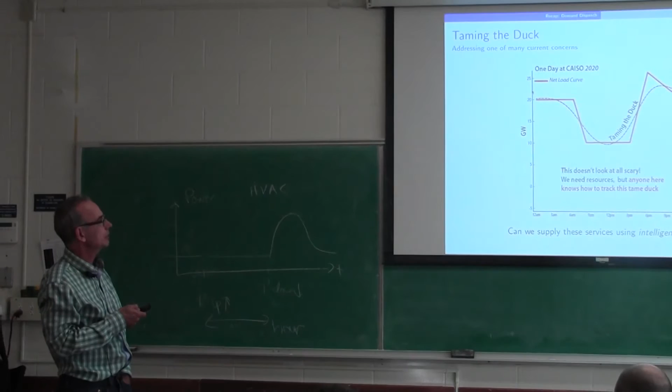So I started to talk about this work with Anna Busic, but just general principles about how you would deal with an on-off device, and I'll go and explain that a bit more. So again, I won't go through this again, but the first thing I think a first step as a control engineer is to look at the thing you're trying to do and break it up based on the resources you have. That's the idea of this.

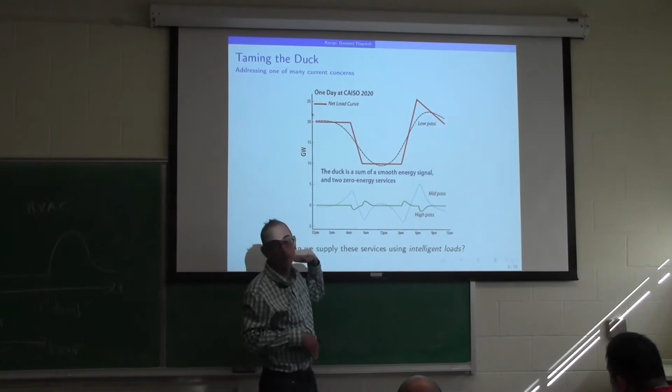I had this duck curve envisioned of the future of power net load in California, load minus solar generation. If you break it up into 3 signals, the low pass, mid pass, and high pass, it doesn't seem difficult at all, as it did in the beginning. Because you can shape that slope, shape the ramp so that traditional generators, whatever resources you have, can follow it. And then these are zero energy signals that you can get from other resources. So this is the way a control person would think of this.

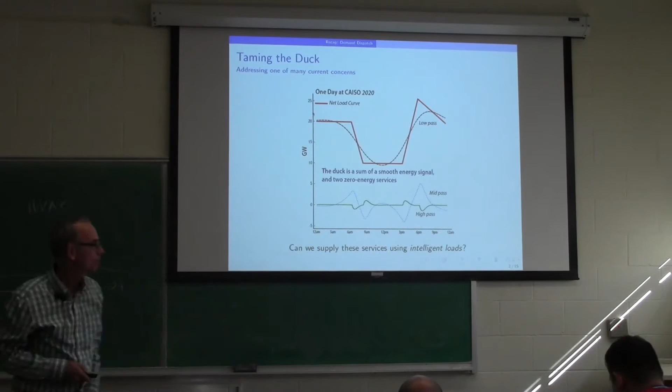I think any control person who's faced reality before... And we had a fun discussion after lecture on Tuesday. On airplanes, there are flaps and ailerons, and flaps have slower motion, we think, than ailerons. We have to look this up. So it looks like those would be flaps and those would be ailerons in an airplane. Let's look that up before, make sure we're right.

So how do we get these intelligent loads? Basically, this is another example, I won't go over it again. But if you wanted to get the purple and the blue signals, how would you get them?

The red is from traditional generation, most likely. I mean, what else could it be? It's energy—you need a controllable energy source somehow. I don't know what we would do if we only had thermal, wind and solar, and no large-scale controllable resource. We'd be dead, wouldn't we? So at least the next 50 years we will have traditional generators, and they will be able to track signals like that. The point here is 50% renewable integration is probably trivial. I bet we could do that in the next 5 years, based on what we know today, if we were allowed to get going.

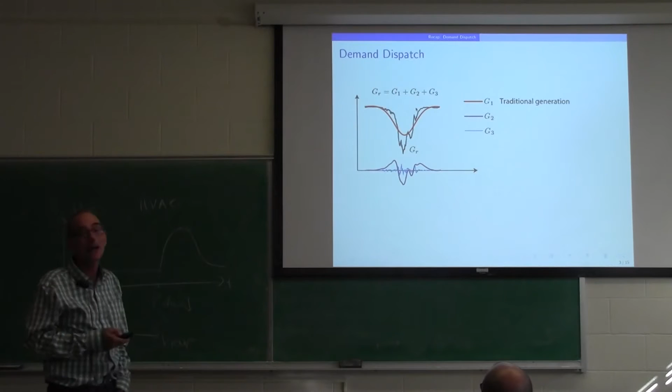So again, the purple is low frequency pool pumps. Florida Power & Light is on it, and our group has for a while too. Water pumping is amazing, and again, the blue fans in commercial buildings are a big load. It's really surprising—the energy consumed in these fans is like a third of the energy in a commercial building's HVAC load. It's amazing, and they're incredibly flexible. The people who actually installed the stuff at Pugh Hall said, I'm wrong about noise pollution—there's no noise pollution, you can't hear a thing. It's hard to believe, but that's what they say.

So the high frequency part, which is the most expensive product in PJM, is the thing that's totally free. It's like air—it's everywhere. And this looks much, much harder, but then this is huge. Pool pumps are just, there are a lot in Florida, but trivial in most of the world. But water pumping overall, all over the world is massive—sanitation, agriculture—and it's everywhere. It's very, very flexible. So we've got this, and the question is how to harness it.

How do you get the flexibility? How do you create that signal from loads and do it in a way that's not disruptive? And that term demand dispatch that Google coined, and I'm trying to promote, is this idea of being able to track a signal like that without impacting consumers. This is all marketing, okay—it's just I want a term that doesn't mention prices. There's no price here. The economics comes later. After we build the product, then we can talk about markets.

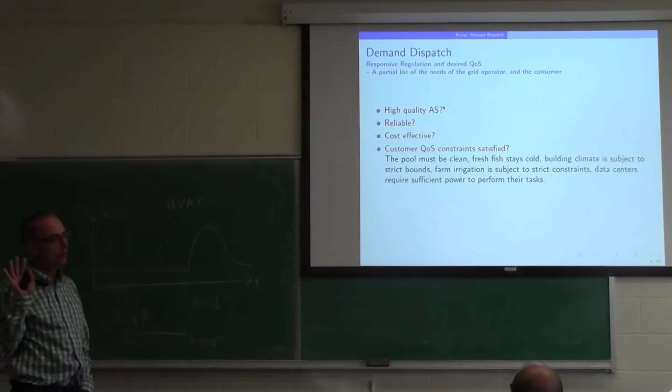All right, so again, we did this. I'm not going to say it again, but we want high quality ancillary service to the grid. It should be reliable—those are grid level issues—and cost effective, both for the grid operator, mainly for the grid operator. But this whole thing here about the consumers being absolutely untouched—I don't want them, unless they volunteer to suffer a bit. I don't want them to suffer.

And so basically this idea of virtual energy storage, which is a manifestation of demand dispatch, is intended to achieve all these goals simultaneously. And I was screaming last lecture that you need a certain distributed control architecture, because if you want to maintain the QoS constraints in particular, something there has to be monitoring QoS, like the temperature in the building and things like that. But it's much more important than that—you need a particular control architecture for a lot of reasons, which I'll explain.

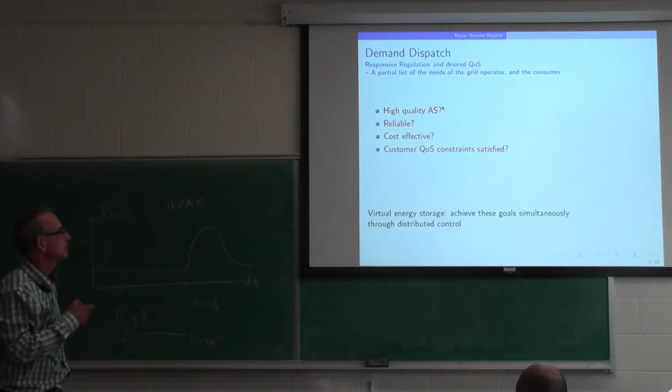All right, you with me? So this is what I want to go through. So basically, one load would have an architecture like this, which I'll explain. There'll be some signal zeta t, which was rho of t before, which is going to be broadcast to a collection of loads. So maybe all residential water heaters will get one signal, and all residential pool pumps will get another signal, and all commercial chillers will get one signal. You'll break this out. I'll explain how you would do that at the end of the lecture, how you would decide how to allocate different resources and do this.

And each load monitors its health and other quantities. So the load has two measurements: a grid level measurement and its own state, which for a refrigerator would be temperature and whether it's on or off. Now again, the pre-filter I'll explain later.

The decision rule here, do I turn on or off, is a major challenge. And as I said, Florida Power & Light, I think, is thinking of centralized control. They'll have a list of all 800,000 water heaters, and they'll turn one off and then the other and then the other. And maybe that's, maybe it'll work for them, I don't know. It sounds like they don't need to do that anyway. And also, it's intrusive as hell—they'd have to collect all that information and send it to them. They would need to know the state of health of every fridge or every water heater, every home. So it would be like a combinatorial problem. They would do it, yeah. The combinatorial—I mean...

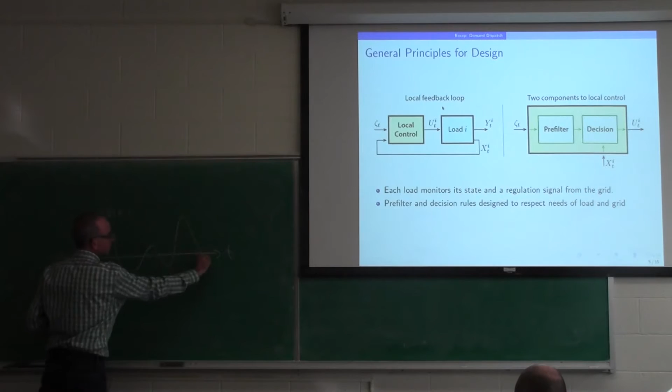Let me go back to the goals again. Remember, like the low frequency things I've talked about sort of look like that. Maybe that's... one hour.

Because we're always talking about the deviation. So the average power is, say, 500 watts. So we're talking about deviation from 500 watts for the aggregate of pools. So you can imagine how hard it would be to do that. I mean, sure, you could write code to somehow fill this in with staircase functions and then somehow stack these all together. But I don't know.

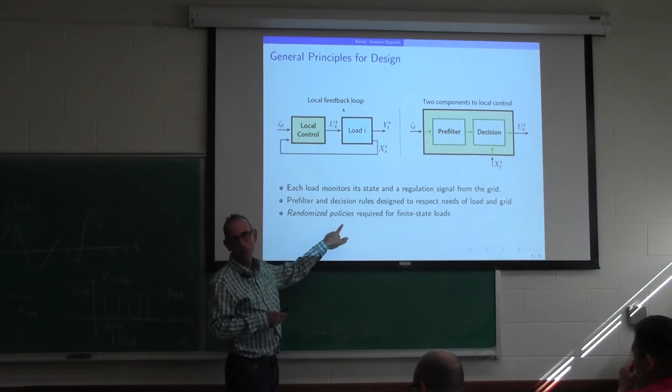So the decision making, do I turn on or off? That's a hard problem, and I claim that randomized policies are absolutely required, which means I have to define randomized and I have to define policy. And so it's fun to type in randomized algorithm in Google to get enough hits. And you'll find 1,000 books, 1 billion papers, and all sorts of things.

And this particular flowchart here, see the rand command there? It is to avoid synchronization in a communications grid. So everybody's backed off. They don't all jump back in together when congestion clears. They wait some randomized time before they get in. Now, this is a terrible analogy because randomized algorithms in communication are known to be inefficient. The capacity is maybe a third of what we can get from a more central, non-randomized algorithm. The typical randomized algorithms that have been proposed.

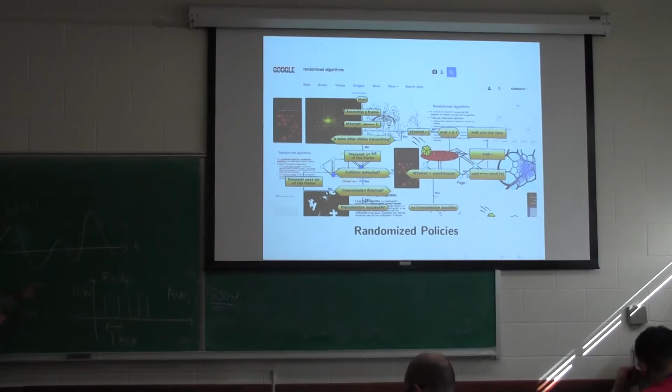So the only point is to say they're used a lot when you need a very simple solution to a complex, sort of combinatorial problem, like trying to fit in all these blocks in this curve. The randomized policy is not always bad. It's only in cases where, like when this was first done in Hawaii, it was for incredibly cheap hardware. They wanted really simple, cheap decision rules for multiple access communication, and so naturally, with so little information, so little computing, you had low capacity.

But with a little more information, a little more science, there's no problem at all. Randomized policies are awesome. But I have to define randomized and I have to define policy.

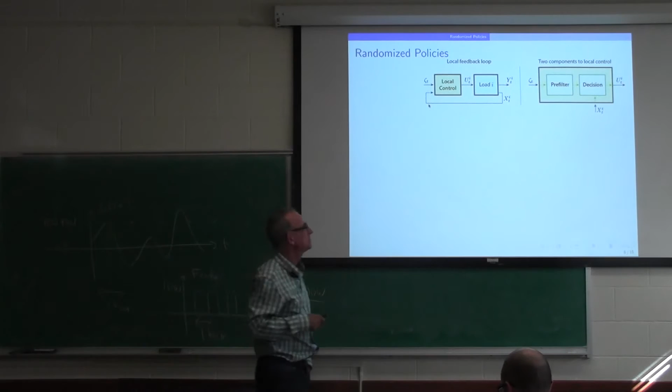So let's do it. You weren't there. You don't have to sign. Yeah, that was for the talk. Okay. So we covered all of that. Just kidding. Okay.

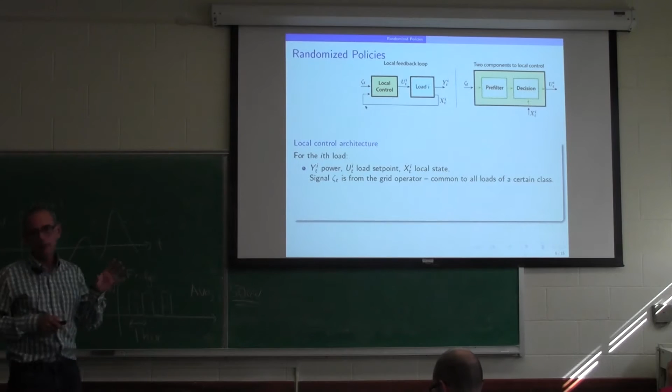So what do I mean? So basically, here's again the local control architecture. Again, this Y out here is going to be power from the load. So it's 1 kilowatt, 0. 1 kilowatt, 0. U is a set point. So let's mainly think it's on or off, but it might be multiple. Like fans have multiple speeds, low, medium, high, or off. So there might be 4 values, but it's going to be discrete. I'm just thinking about what do we do in these combinatorial problems.

And then X is a local state. Again, for a fridge, am I on or off, and what is my temperature? For a pool, am I on or off? How long have I been on? How long have I been off? And so, for any kind of system, you can imagine what you think about as a state. What are important variables?

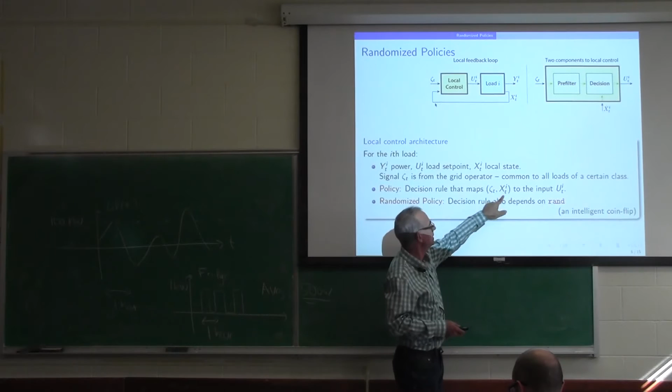And again, zeta t is from the grid operator and common to all loads of a certain class. A policy: in industrial engineering, control, communications, it's a decision rule. It's some rule that takes this and maps it to decide, do I turn on or off, or what power set point should I be at? Okay, it's called a feedback control law. In control, or actually more in operations research, they call it a policy, but this is what we're talking about.

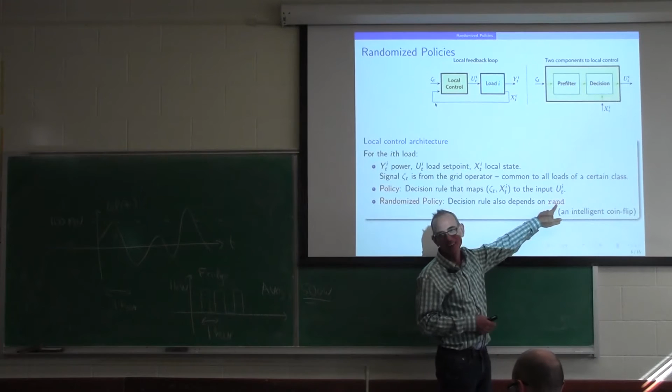But a randomized policy again is just one that also uses the rand command in MATLAB. Not really, but it has a coin flip. And so it's an intelligent coin flip. And that's what's dangerous. When you say randomization, it sounds like you're saying arbitrary, like I'll do something crazy. And not at all. You do this very, very careful design. All right? So it's a very, very intelligent coin flip.

And you do this in a way to make an aggregate of loads follow that smoothly and beautifully. You want the aggregate of loads to look like a perfect battery. You can charge and discharge, and just do what you want with it. And that gives you degrees of freedom, is what it is. On/off is not many degrees of freedom, but on with probability 0.2 or 0.3, 0.4, it's a whole range of choices, and so you need that.

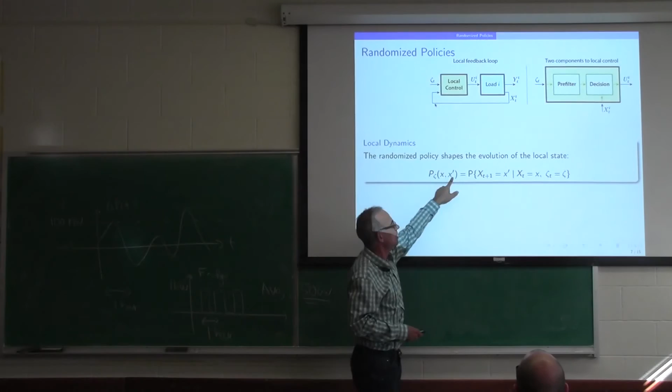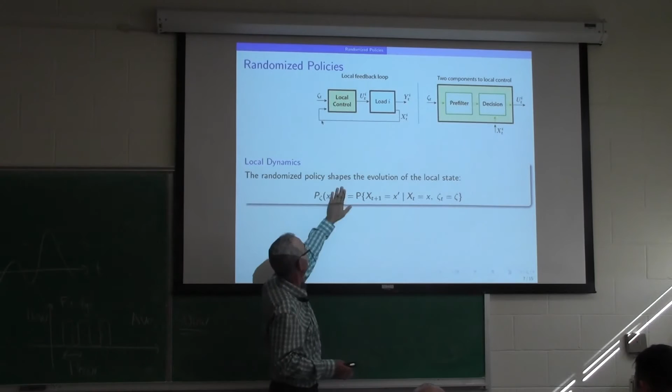So now I need some notation. This is just notation to define what I mean by randomized policy. And I swear this will be the only notation you'll have to see. This is just typical notation. If you take my course next semester on stochastic processes, or if you've taken a course where they cover Markov chains, you'll have seen this. Okay? So this notation is the probability that the new state is x prime, given the old state is x, and zeta t is some value zeta. So I've got a function of 3 variables here that I have to design.

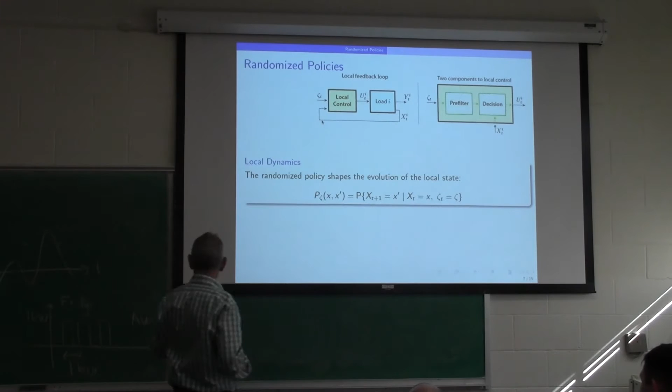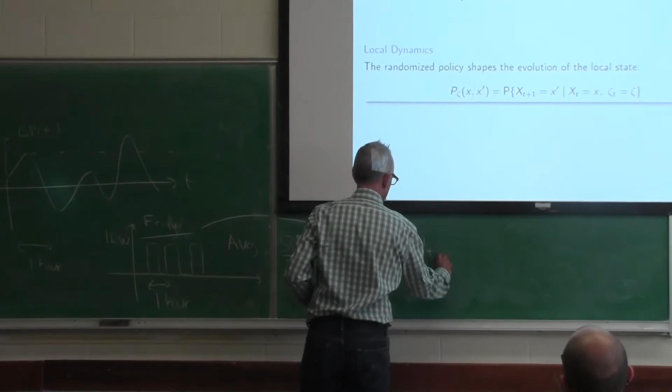And part of this is going to be the dynamics of the fridge or whatever. For a refrigerator, it'll include U of t, which is am I on or off, and it'll include the temperature. So some of the randomness is from nature. People open and shut the door, or a defrost cycle comes on. So that P, I can't design it all, but I can design the part here randomly: do I turn on or off through some randomized control architecture? That's part of the reason why this design is difficult, some of the randomness is from nature, and some of it I'm actually building into the system.

Right? There's no way I could talk about design. I'll give you examples, but the design of this is way beyond the scope of this course. But at least I can give you some examples to give you some insight as to what a good design might look like. Okay? So there's two questions. How would you analyze an aggregate of loads? I've got a million air conditioners or refrigerators. How do I analyze how they behave together? And I'm going to try to explain that today.

I don't know if I can get away with it. And how to design P zeta, I won't try. I don't even know the best way. It's totally a research topic. We came up with some hacks that worked, and I don't know why they worked so well. But that design was the basis of the patent that I mentioned.

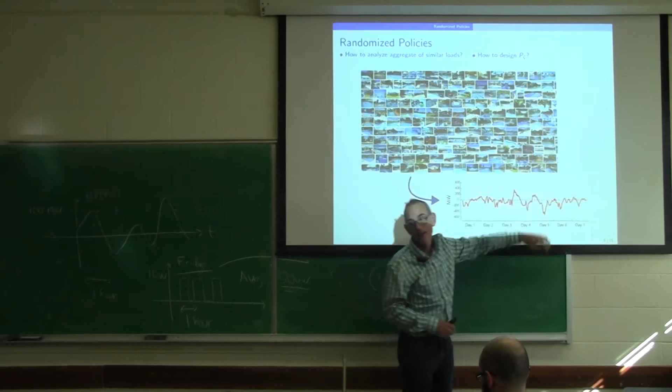But a significant portion of the Bonneville Power Administration's balancing reserves are on very low time scales, corresponding to, look at that, 6 hours down, 3 hours up, 6 hours up, 3 hours down. Pools are saying, yay, we want to help. They're made for that. And unfortunately, there aren't a lot of pools in the Pacific Northwest.

But again, they have gigantic refrigeration plants that consume a lot of energy for cooling, for keeping fish clean, cool, that they can ship off to Japan, things like that, to Asia.

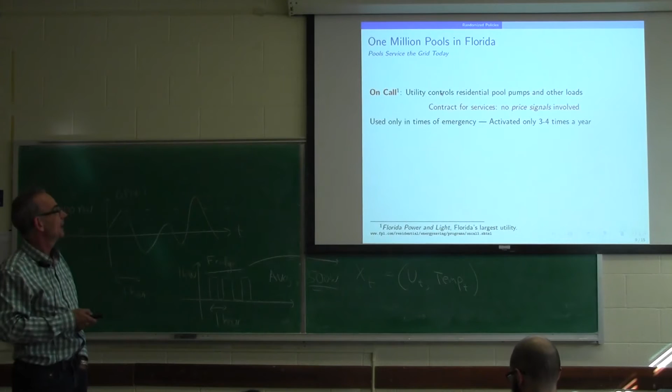All right. So again, this is hilarious. So I wrote this last night. I knew I'd be talking to the on-call people this morning, but you've all heard this now. On-call, we just saw, controls residential pool pumps, water heaters. We just saw that for businesses as well as residential. And again, contracts for services, they laugh at the idea of real-time prices. It's absurd. I can say that on camera.

And today it's only used in times of emergency, but I've heard that they're interested in wider use of this program. So again, this is from a talk 2 years ago, that they have their hands on the switch of nearly 1 million pools. So why don't they do something more with it? So this was a pitch I gave to them actually 2 years ago. All right, so here's an example. How would you design an intelligent pool?

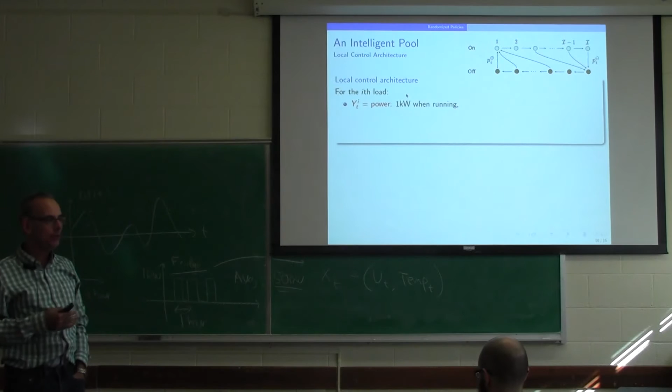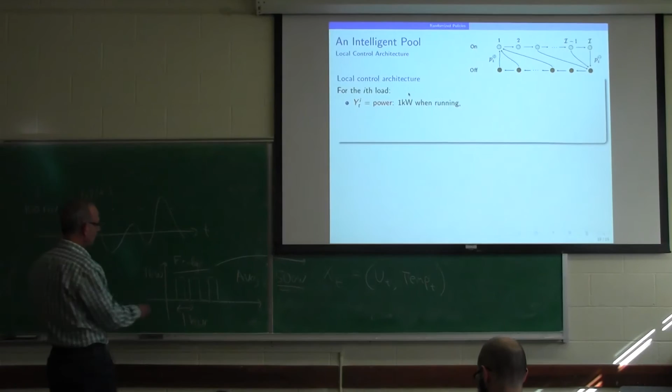So after moving to Florida, I had a pool for the first time in my life. So now I know firsthand how they work. There's a pool pump, and it operates just like that. So instead of 1 hour, it's 1 day. And so the pool pump, say, runs for 8 hours, then it's off for 16 hours. Then it's on for 8 hours and off for 16 hours. But just for simplicity of this lecture, let's pretend it's 12. Mine's on 12 and off 12. I have a symmetric operating cycle.

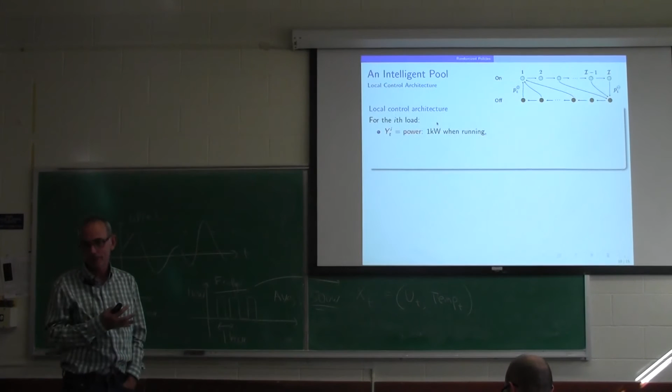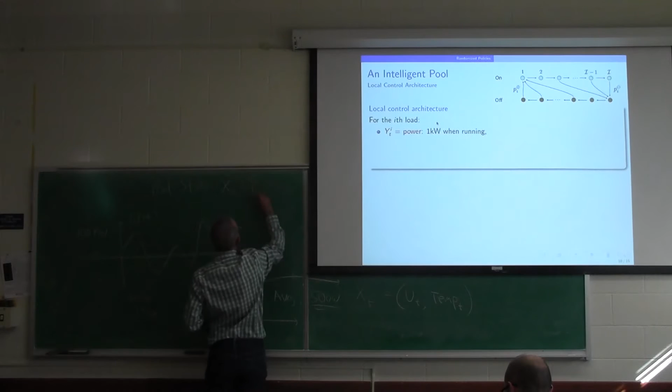And so here's this evolution of the state. So exactly the same. It would be the power setting state, am I on or off? And then the cycle time. How long have I been on or how long have I been off? Because that's the important indicator, right? Basically, if I'm off, I want to know how long I've been off, because when 12 hours is reached, I want to turn on. So that's the important indicator.

Now, people don't care that much. If somebody changed my cleaning cycle to 11 hours today and then 13 hours tomorrow, I wouldn't care at all. And I don't think anybody with a brain would care at all. I'm sure that somebody could convince the public that it causes brain damage to have your pool cycles change like that. But it's not true, okay?

So all I care about is getting so much water flow through per week, say, or per month. Or there's certain constraints. Quality of service is very complex. But I'm sure I could come up with a contract I could accept based on hours. I want the number of hours per month exactly the same as my nominal behavior. No change at all. Every month I want to make sure exactly no change in the total hours. Why? Because I want my energy bill to not change.

And maybe I want to limit the number of cycles as well. I mean, on-offs. I don't want them to be turning on and off my pool pump every minute. So you can't increase my number of on-off switches by more than 50%. That's the idea of a contract. And then they can play with what's left. And so here it's just like a fridge. It's a kilowatt when running. I guess that's a big fridge.

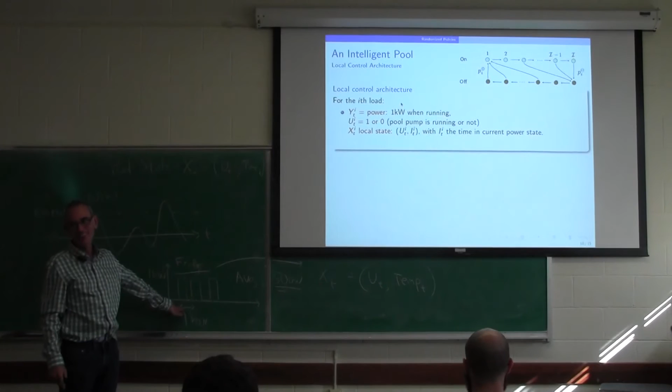And the nominal behavior is that after the equivalent of 12 hours, I go from on to off, and I go again. So the nominal behavior is deterministic. I deterministically move along till I get to 12 hours, jump down, move along, 12 hours, and it's this periodic behavior. A fridge and a pool are the same. Okay. But we're going to throw in some randomization.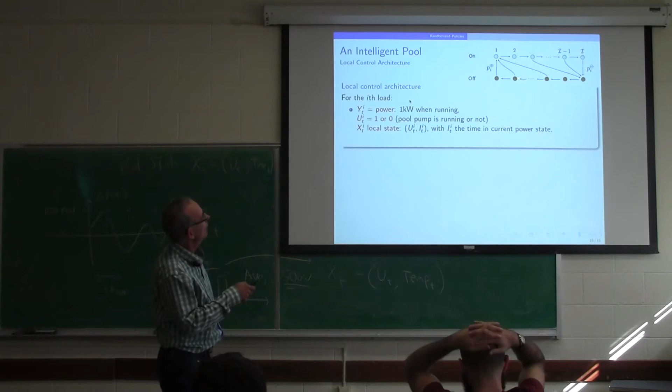So depending on where I am in the cycle, if I'm off here, I can switch on and go from whatever state I'm in to suddenly the one state, because the one state means I'm sampling. I sample. If it's every 5 minutes, I've been on for 5 minutes at the next sampling.

And so designing that probability law takes some thought, because you want to do it so the customer's happy, they get what they want, and you want to do it so that the grid operator sees a battery. I want the grid operator to see a beautiful, controllable resource.

All right. So the randomized policy again maps zeta t, x t, and the zeta t doesn't depend on i. Remember that. And this was implemented in MATLAB, so that's all we've got, the rand command in MATLAB, to this input u t i. All right. And here's the outcome of a particular design. So this is a probability of going from off to on.

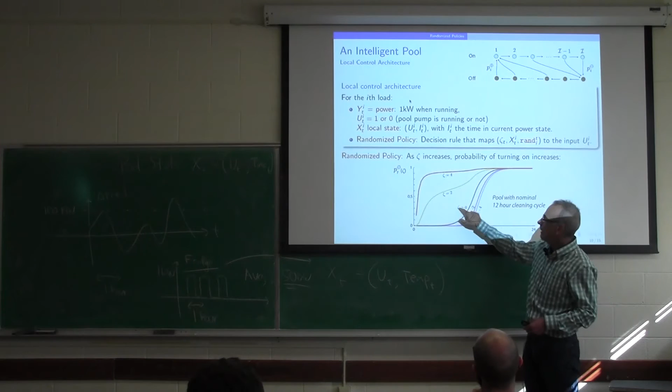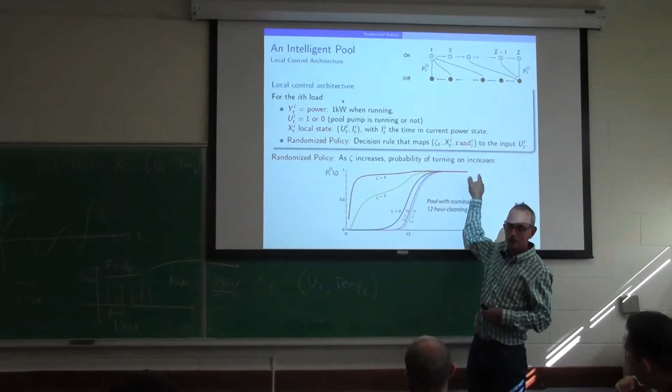And zeta equals 0 is sort of the nominal behavior, which should be deterministic. It should be probability 0 up to 12 hours, and then probability 1 afterwards, because that's how the nominal behavior of a pool really works. We just took that and tilted it a bit. And so basically for zeta equals 0, no signal from the balancing authority, there's no probability, at least I get about 5 hours of cleaning before there's any chance I'll switch.

And then there's a small probability that I'll go from off to on, and it increases to about a half, and then eventually becomes 1 after, say, 16 hours. So I could design that. And so this is basically saying that 6 hours to 18 hours is my upper and lower limits of a particular time off. And then as you make zeta bigger and bigger, the probability of turning on gets higher. So when zeta gets as high as 4, then after only a few hours being off, there's very high probability to turn on.

Okay? So these curves came out of a very complex, strange design procedure that is really pretty mathematically, but really hard to motivate. I won't even mention where it came from. But there's a lot of properties you can come up with from this. But is the curve clear? You can see that zeta equals 4 is pretty nasty.

It means that this pool, after only a few hours, is going to go from off to on. So you don't want zeta equals 4 very often. It's going to cause some short cycling of pools. And that's why you can't have this alone.

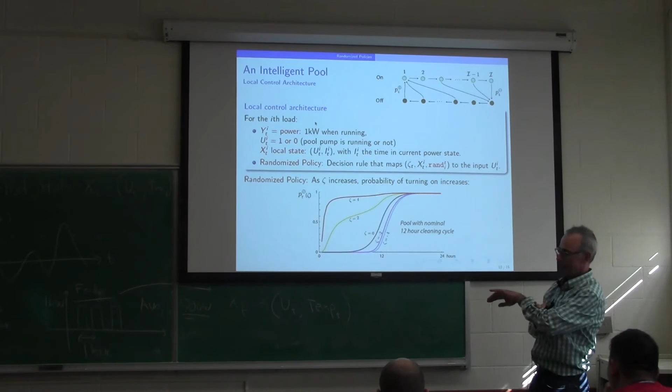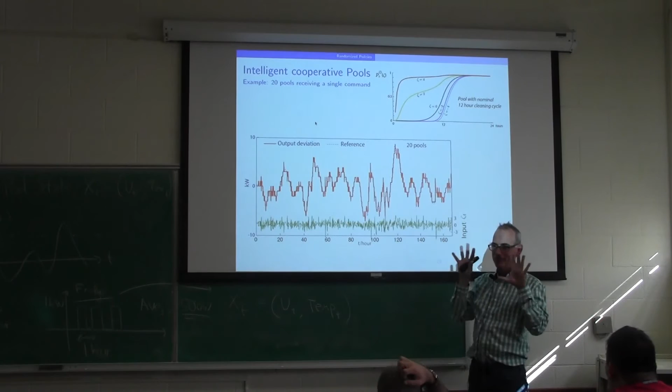Yeah. And this is what happens in practice. This doesn't look great. But remember I showed you a blue signal, which was a regulation signal from the Pacific Northwest, put through a low-pass filter so you wouldn't put the pools in stress. But these are just 20 pools with this randomized policy, okay?

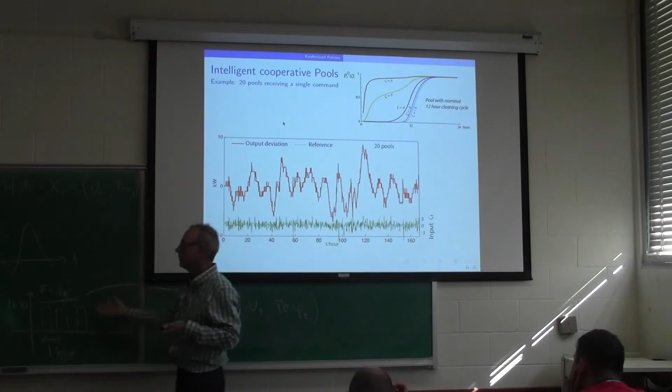And you can track the balancing authority signal almost perfectly, but you see some chattering. Well, they're just 20 pools. I mean, come on, that's a kilowatt, isn't it? Yeah, that's a kilowatt. Of course, it's discrete. That's the whole Tetris thing. If I tried to ideally place these in here, I'd get a 1 kilowatt error, obviously.

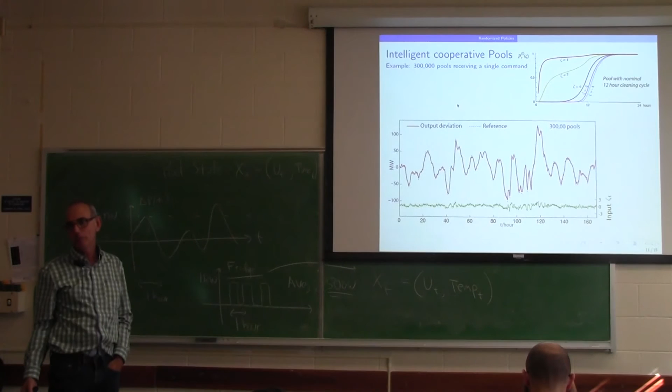So what happens when you go to a higher number? If you go to 1,000, it's perfect. And unfortunately, I didn't have that. I can only go to 300,000. And I wish I did. I wish I had a plot of 1,000. But it's perfect. If you go beyond 500 pools, you track a reg signal perfectly.

Why is there some error? It's because of a feedback architecture. You end up with a little bit of high frequency bits being truncated off. There's some high frequency components that really were too high for the system. Big deal. The rest will be taken care of by another resource. And you see that the input luckily does stay fairly small with this, even though it's 300,000 pools, 100 megawatts. Should we do the algebra?

Okay, so we've got, it looks like that's 1 kilowatt. So when all the pools are on, you have 3 times 10 to the 5th kilowatts of power. And let's switch to megawatts. So it's 300 megawatts. So it's 300 megawatt max, and it's 150 megawatt average for a 12-hour cycle.

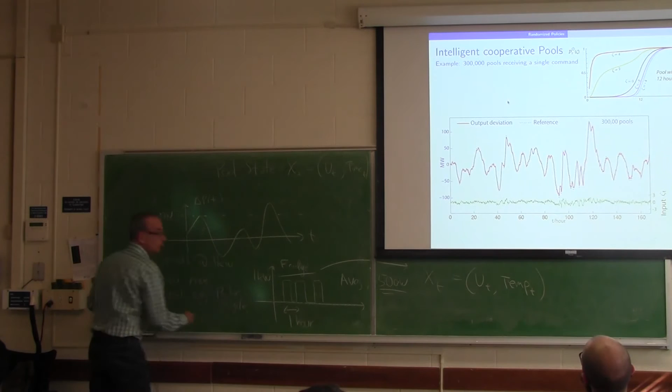And that's what I'm assuming here. I'm assuming a 12-hour cycle. And so we can increase power consumption to the average. If all the pools were asynchronous, they're all periodic but completely asynchronous cycles, then they'd be consuming almost exactly the average of 150 megawatts.

We could also make them track a perfect square wave at what magnitude? Yes, you get them to go up to 300 megawatts to 0. 300 megawatts, 0. Well, that's really a square wave of amplitude 150 megawatts, because we're always looking at deviations from the average. So they could track a square wave of 150 megawatt peak perfectly.

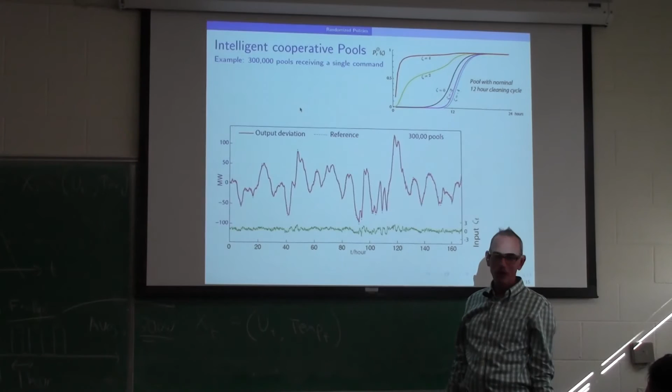We're coming close. We're getting up to 100 megawatts there, and we're not abusing them too much. What's that? You go past 100. You go past 100, yeah. So we're getting very close to, if you get up to 150, you've turned off, or turned on every pool. That's wild. I don't think we're going to do that in practice. So this is really pushing the system to its limits.

Wait, from every pool? Yeah. I think you mean between 0 to minus 100. What's that? This deviation. Yeah, this deviation. That's why it's going negative. So this is the power consumption minus that average. Yeah. So here, forget about signs, whether you turn them all on or off. Yeah, I was confused by the numbers. Oh, yeah.

So anyway, I didn't tell you how I designed this. It's a feasibility study. I'm going to have to say a few more things about this. There's so many things to say. But anyway, you can get pools to do it without any thought at all. Just all independently flipping coins, and they perfectly track this. And the issues I mentioned in communication don't arise. There's not an efficiency loss or a capacity loss or something like that. Randomization is gold. It's amazing.

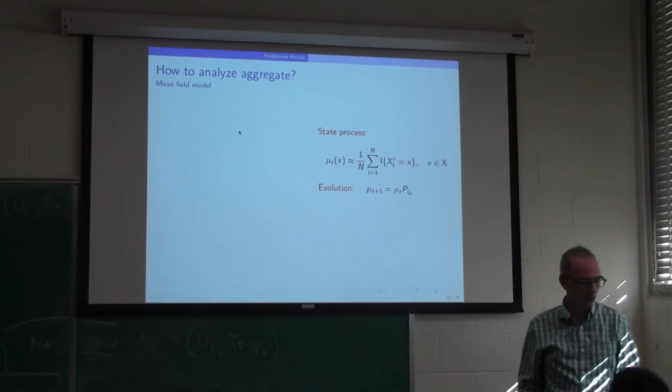Okay, I'm going to have to slow down. I want to basically talk about how you would actually analyze this. How would you even get your head around thinking about this system? Okay, and this is a universal concept. I'm not talking about just my research. What you end up doing is you look at what is called the empirical distribution of these states. So remember, X is UT, am I on or off, and how long have I been on or off? That only takes on, say, 48 different values, or 100 different values.

The same thing with a refrigerator, we would quantize temperature in bins, so it would be a finite number of values. And all we're doing is counting up, for a particular time t, the number of loads that are a particular value x, where capital X is all possible state values, all possible pairs here. And then the division by n is just a normalization. So this is a histogram of the data. Now this is information that I don't want the utility to have to collect. This is just for analysis.

But this, it turns out, evolves. If you think of this as a row vector, so x takes on 100 values and call them 1, 2, 3, 4 up to 100. Order these guys, first state, second state, third state, and look at it as a row vector. Then the new state at time t plus 1 is equal to the old state at time t times this. The approximation is because if I took equality here, I'd have an error here. So there's a bit of error.

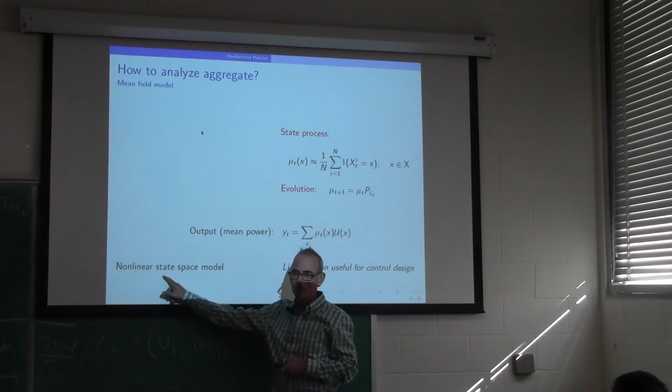Mu here you can think of as a state in a state space model. And y is a linear function of that state, right? Because that's just an inner product.

So what's nonlinear about it? Let's make sure, some of you are falling asleep, that's why, and some of you are checking your email.

But what's nonlinear about this equation? So this state evolution equation, there's the output.

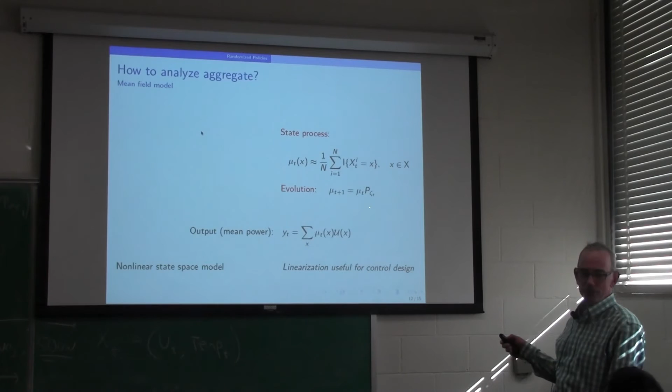Yeah, so remember, we designed... So it's a random... It's a matrix of numbers, you know. It's just a matrix.

And so I didn't write down this whole gigantic matrix. I just gave you what part of it when I showed these plots.

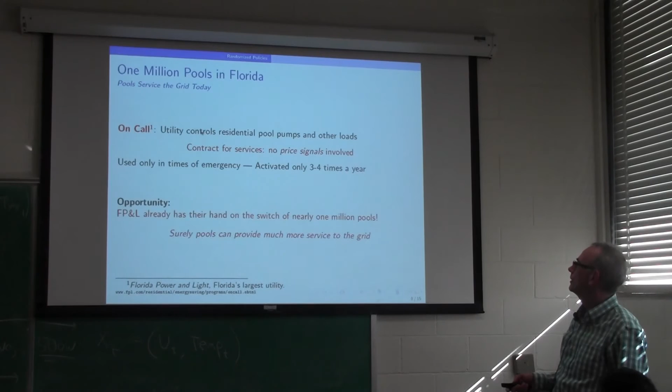And the thing is, unfortunately, it's always going to be nonlinear in zeta t. So zeta t is a signal that the balancing authority is going to broadcast out to all of these loads, right? And so they want to really understand the dynamics of the system, and that's the trouble.

It's nonlinear in the control signal zeta, and it always is going to have to be. The fact that p takes on positive values, p is a matrix with positive values, means it's going to be always nonlinear in the control.

But what's awesome is how almost linear it is. If you approximate this by a linear function of zeta, it's incredibly accurate in the examples we've looked at.

Now, so linear zeta, I think, what do you think if I looked at a Bode plot, what would it look like? A linearization of this. If I had an approximate linear model, give me an idea of the magnitude plot.

That's a hint. But pools like 24 hours. You know, if you ask the pools to track a square wave of period 24 hours, a symmetric square wave, they'd say sure, and nobody would mind at all. You know, they don't like so much a gigahertz. And they don't like being off for a week and then on for a week. And in fact, that P was designed so that's impossible.

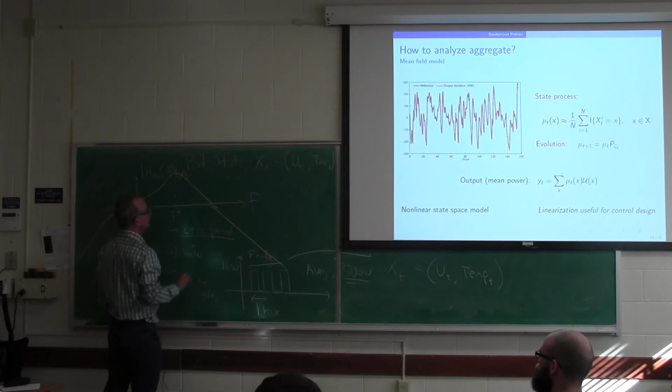Put a star there. So there's some F star which corresponds to a 24-hour period. So that's what you always find out. When you do this, you find when you go through it, you get something like that. So this is pretty extreme, but mainly it's a sketch. You get a resonance here at a frequency of 24 hours.

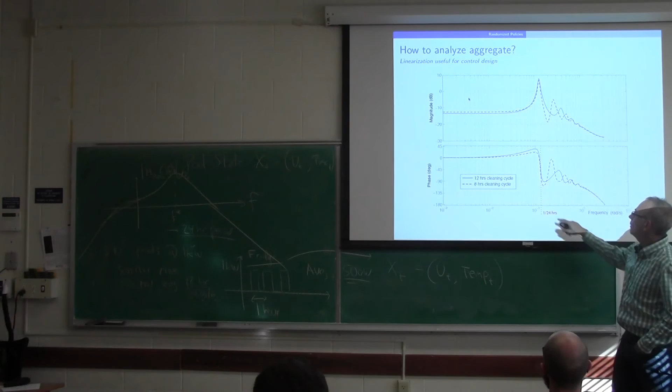That range there is about 20 dB, so it's tenfold. And so it's got a very, very extreme resonance at that point. And you get this big phase drop. Here's two different designs, one for a 12-hour pool and one for a pool that's on 8 hours and off 16 hours. They have resonances at the same point because their period is still 24 hours.

You know what I mean? If you had a pool that was on 6 hours, off 6 hours, on 6 hours, off 6 hours, then its resonance would be moved over. All right, is that clear? So that's useful for control design, but that resonance is a bit annoying.

You're not allowed to answer it, by the way, if you're doing research on this. If you're doing research on this, you're not allowed to answer the questions. What were you going to say?

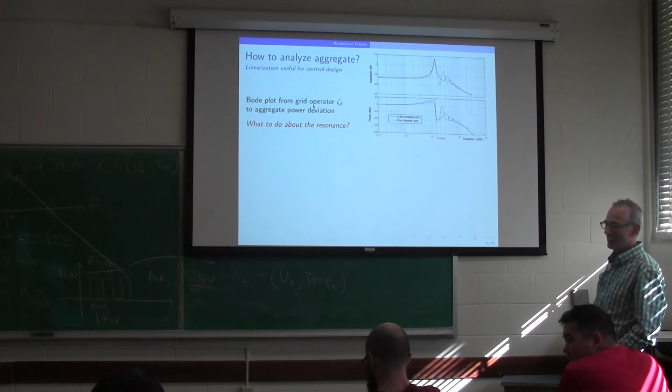For the low frequencies, if we see the low frequencies, it's a constant, but it's much, much below the resonance. So the low frequencies are also, pools aren't comfortable with tracking the low frequencies as well. Oh, no, but we know that. Physically we know they're not. But also, it's surprising that this...

It's not explained. It's surprising this doesn't shoot down because the design was such that it didn't allow... I mean, well... Oh, I take it back. I mean, look, if I take a square wave and I just shorten that by 10%...

That I'm going to introduce a DC component. I'm going to reduce my average power consumption by 10%, or 5% maybe, and that is a DC component. So that's what that corresponds to. Is that the pools decide that instead of a 12-hour clean cycle on average, they have an 11.5-hour clean cycle per day? So they use a little less power. So it's not so dumb, you know. It does fit. It fits the model.

Actually, I take it back. I didn't really think about it carefully enough. So yeah, the fact that it levels off is not so surprising. It would be removed from a contract, possibly, where they would say, no, we want the exact same amount of power per month.

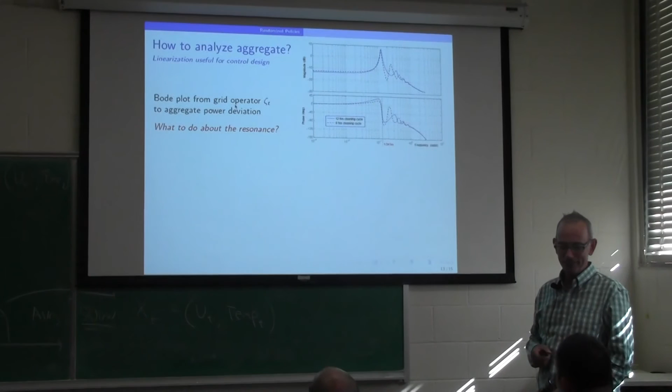But do you know what to do about a resonance? Feedback would be one way to do it, for sure. And that's how we initially did it. In our first work in this area, and still, we assume that the grid operator has access to partial information about the aggregate power consumption of the pools, and they design a feedback law to get zeta t, taking into account that resonance. And you end up using a PI controller. It works fine. So that's one way to do it, and that's the first way we thought of doing it, and it's fine.

But if you wanted a perfect battery without feedback, you'd have to do more work. The beautiful thing is we can do whatever we want at these loads. Once we learn our design has a resonance, we can shape the signals to suppress it, and since the resonance is so exactly identified, we can play around with this. That's why I emphasized this pre-filter at the beginning - you can design a notch filter which at least makes this much less extreme.

Okay, alright. We're supposed to have a break, aren't we? We got like 20 minutes left. Okay, let's go. Okay everybody. Are you okay? Oh, you're not falling asleep.

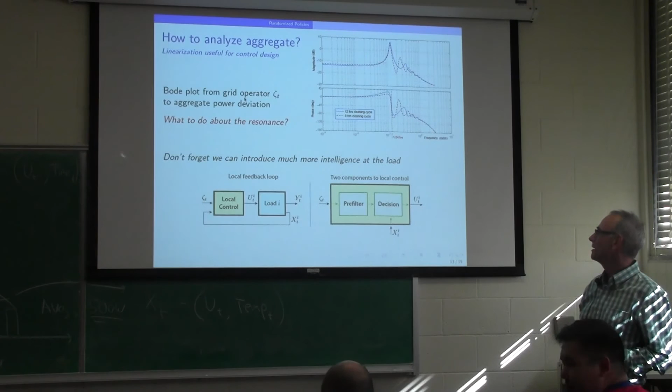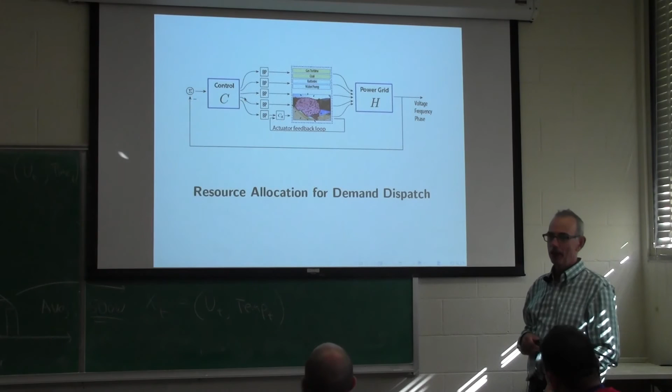Alright, well this won't take that long, but it's interesting to think about how you'd actually implement this in practice. This is an extension of what PJM does today - they have a regulation signal and break it into different frequency bands, just two today, based on the different resources available. They've got expensive resources which get reg D, the high frequency reg signal, and the rest goes to cheaper resources. So why not do that with all these things?

My initial motivation for making you go through all the detail of modeling the grid was just to get to this slide now. That's not completely true, but I mean, I definitely throughout was thinking of getting to this slide. You need to, if you're going to think about what's a good idea in terms of ancillary services and what's a bad idea, understand the dynamics of the grid on this scale.

This is from a lecture last year. I talked about a typical macro model of the grid, and I use this paper by Baldick et al, only because I already had data for this particular example. But it's pretty generic - this is where it has its resonance, and it's what you'd find from other regions of the U.S.

We've talked about why fear is justified here, and you all better know that - this could be a midterm in 2 weeks, and someone's going to ask you to explain why fear is justified. Hopefully you saw that when you played around in Simulink - you saw some instability, I hope. And if you did, it's because you made your grid crossover frequency too large, you had higher gain out here where you shouldn't have.

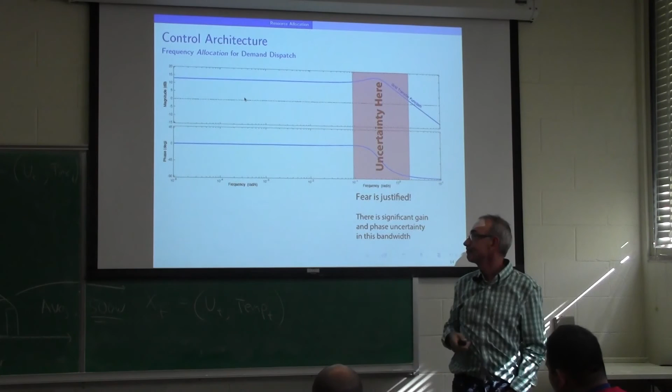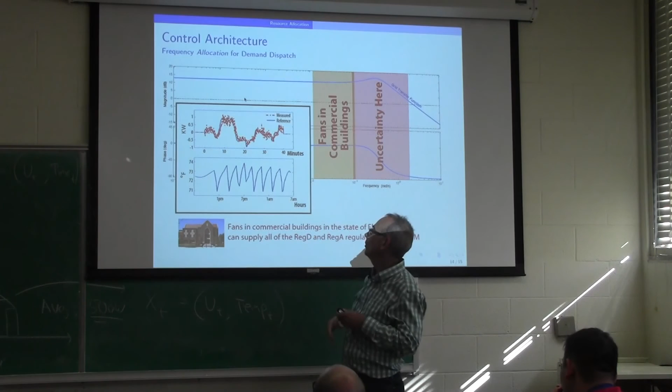Okay, so we've already said this - this is the reg D and reg A range. This frequency range corresponds to periods of 5 minutes, 2 minutes, 10 minutes, something like that - it's reg D and reg A from PJM. As I mentioned before, like fans in commercial buildings, it's all done - they can take the entire regulation requirements, take this part of the frequency range, and send it to a combination of batteries and commercial buildings and other loads that can provide that range. You can do the accounting.

I'm sure there's enough for the entire planet - I think probably commercial buildings in Florida could take care of the whole U.S. Commercial buildings in the U.S. could take care of the whole world. It's just because the total magnitude of this in this bandwidth is not that great in this higher frequency range - it's not that enormous.

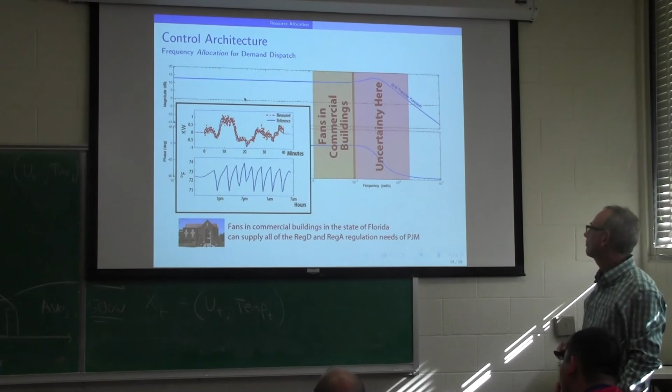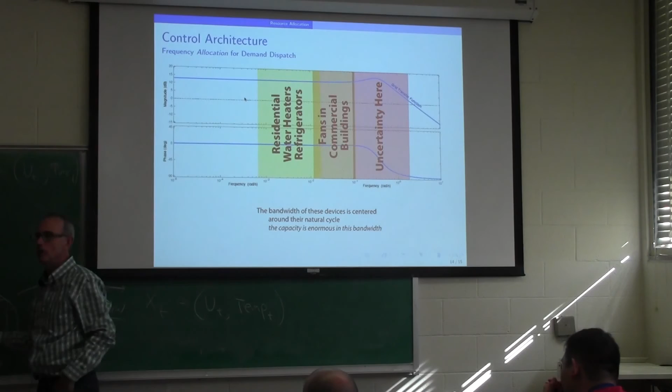Okay, so here is where I haven't done the whole accounting, but I know that a refrigerator has a nominal period of an hour, so it's going to be able to provide a bandwidth from 30 minutes to several hours of regulation. And that's for a residential water heater - residential fridge, residential water heaters. There's commercial water heaters that will get the lower frequency ranges.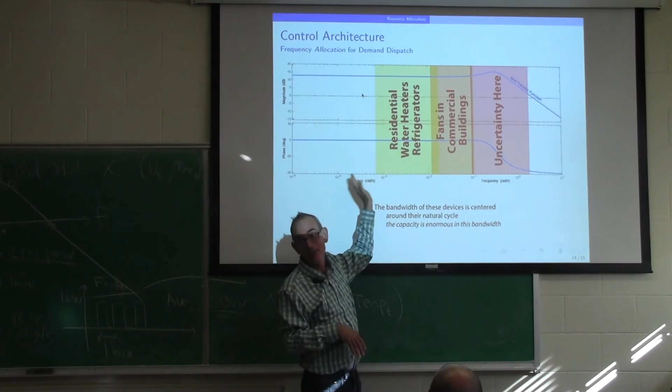I mean, and they're huge loads, a massive load in the US. So they're incredibly flexible, and they are batteries. They're thermal batteries. They're storing hot water or cold air or something like that.

And so there's a company, I mentioned Ice Energy once. I sent an email about them. Ice Energy is a little bit lower frequency. They're putting big ice cubes on buildings as a way of storing energy, and they cool the ice when electricity is plentiful. And I thought they'd gone out of business, but they're back. And I'm sure it's because I was very excited when I first heard about them.

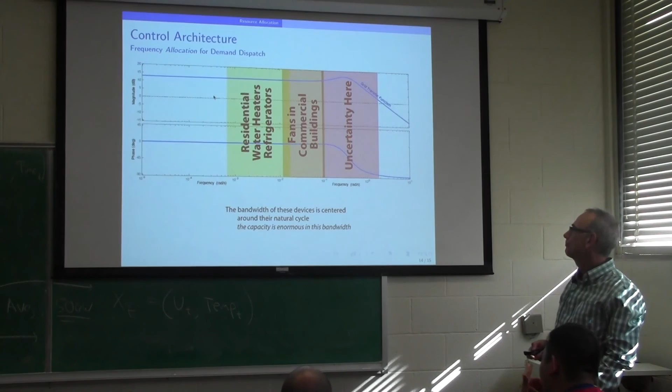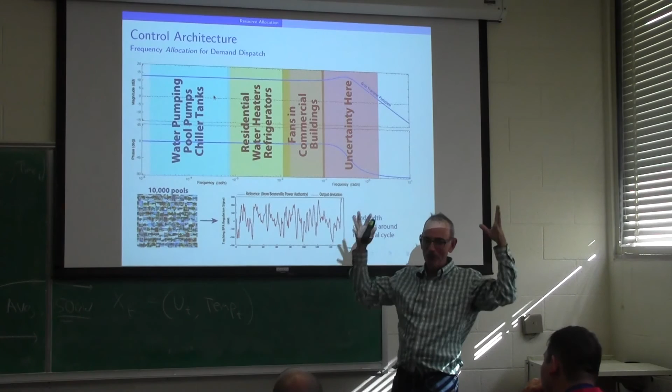So ice would be further over here. Ice Energy. So you've got these massive ice cubes with tubes running through them, and you freeze the ice when electricity is plentiful, and you don't freeze it when it's not. That's a low frequency ancillary service on the order of hours. And so water pumping and pool pumps and chiller tanks and Ice Energy's air conditioning systems, I go out here, the pools, but that's 10,000 pools.

That's an old plot. That's all done. It seems like it's done.

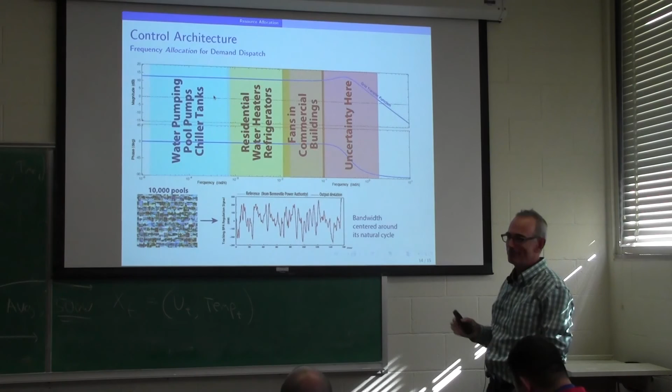And the most amazing thing is California. I mean, for low frequency regulation, 20% of their power consumption is just pumping water. It's stealing water from Mexico, and they pump water from the Colorado River, I always joke, to water the lawns in Beverly Hills, for agriculture.

Yeah. California doesn't have any water right now. Yeah, but people are still drinking water, and it's not a joke that all the water they can from the Colorado River, they take over the Sierras, and it goes into Southern California mainly for agriculture to water the crops, and those almond trees are a big part of the economy in California, and they get watered still. And the vineyards, my God, it's sad. I was in Sonoma. It's so sad, how dry it is.

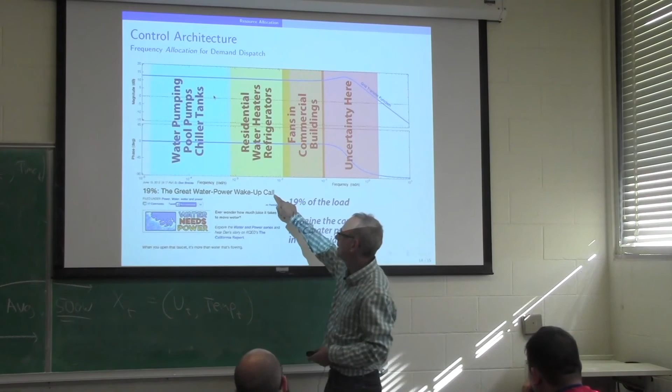So they still, this is not old. This is, I don't know. But yeah, you're right. There's no water in California. There's no economy anyway. 2012? Oh, 2012, yeah. Well, still, it hasn't changed.

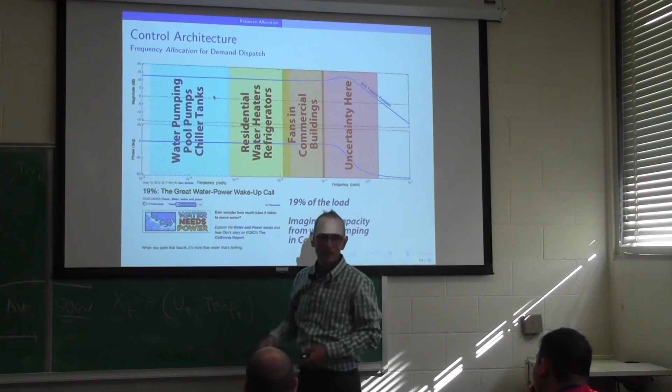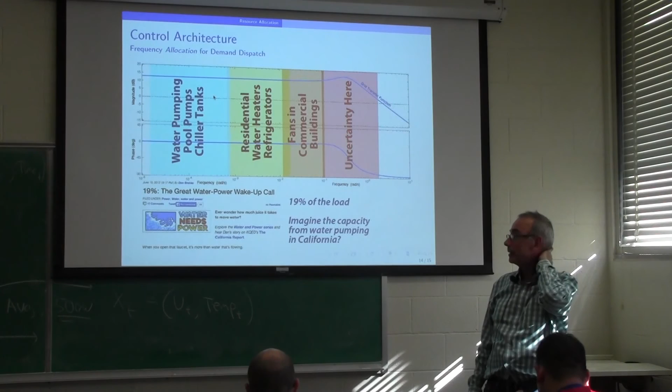But also just sanitation in big cities, they have to pump all that stuff. It takes a lot of energy. It's amazing. And I don't know the accounting in other parts of the world, but California, which is going to need so much regulation services, they've got so much flexibility. So the capacity there is fantastic.

So just let's stop. So the big thing is, again, can buildings and swimming pools replace batteries? I mean, I'm not advocating that. I think they're an adjunct that's going to work alongside them. But the volatility of renewable energy is manageable, and people who claim that it's expensive, just give them a quote I gave about Henry Ford: he could never have sold cars without the bicycling lobby. If bicyclists had not lobbied for roads, Henry Ford never would have gone into business selling cars.

So we're currently missing infrastructure. The world is, except for Florida Power and Light. Florida Power and Light has put in the infrastructure, so they're like Henry Ford. They can go tomorrow because they've got the infrastructure set up. And I really think this decentralized control architecture is the way to go. I can't imagine collecting all the data about quality of service state, that XT, for every load in all of Florida, and then doing this combinatorial nightmare of who do I turn on and off. You're taking on the responsibility as well. I mean, you're just taking a huge risk as a company.

I think putting as much intelligence in the load as possible simplifies the control job at FP&L or elsewhere. And the capacity is enormous, and I wish I could tell you more about how much. I only know for the higher frequency range. I can give you numbers. For the rest of it, I just have Neil's promises to do the work. But the open questions, I don't know. Oh, this is bad. I revised these notes late last night, and this is from a technical talk.

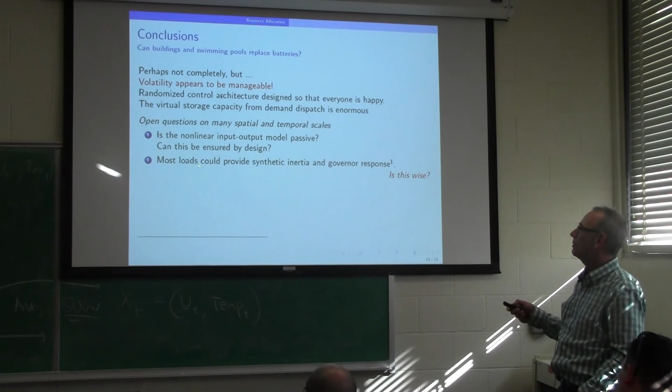So these things have to be done together. This whole thing about synthetic inertia and governor response from loads, that was a dream of Fred Schweppe from MIT. He patented something for doing that. So every dishwasher would provide droop. It would ramp up and down power consumption on the order of 10 seconds, like governors do today, and provide synthetic droop for the grid.

It never worked because, no, it's too big. Good for dishwashers. Yeah, all the loads providing that. I mean, they did studies. Remember how conservative NERC is about droop gains. There's 5%. Remember the NERC article? It said 5%, no greater than 6%.

If you've got a whole bunch of loads going and flowing around, you have no idea what their gains are. It could be sometimes the effective droop gain is 50% and sometimes it's 0. So that's the range. That's where the scary part is. I said fear is justified in this frequency band. And so my gut feeling is if you do this, you'll be very conservative. Really, you'll help out just a tiny bit and let the governors do their job.

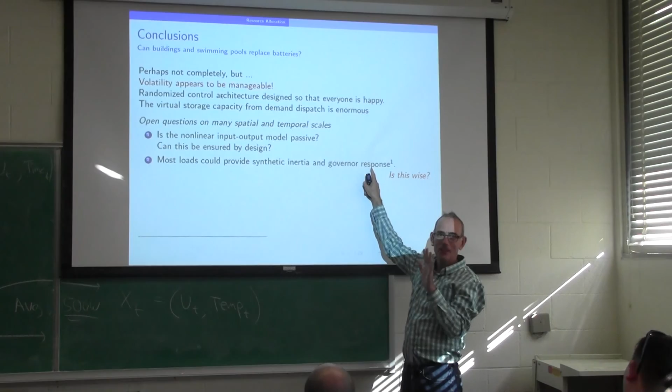But what about a homework problem? So that's what I did. That homework problem I showed you at the beginning of the lecture, I'm not asking you to do that. I'm asking you to do droop at low frequency. Why isn't that done today? I don't know. Or you just say it's uncertain. Well, but we don't care about low frequencies. Uncertainty in low frequencies, I mean, it just doesn't matter.

This pool transfer function, I don't know its shape very well. Remember, PI compensation, all I'm doing is cranking up the gain. Think about how crude PI control is. It's just incredible. You don't need a lot of model certainty in low frequencies. It's only at that certain band where you really need to know the plant well. So I came up with this homework assignment. I started thinking about it after last lecture, but it won't be too hard. It'll be fun to play around with.

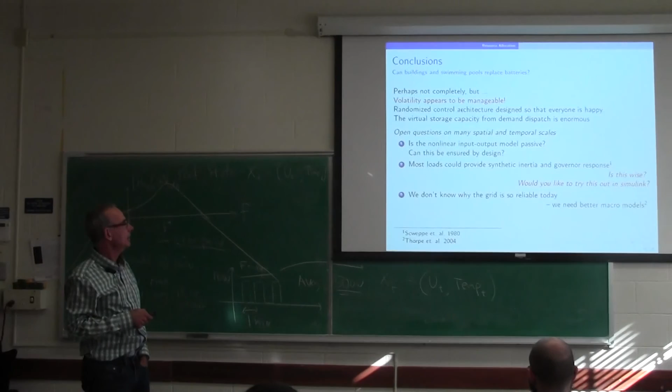And again, we don't know why the grid works today. I've referenced this paper by Thorpe, so I can sometimes come off like I know the answer. Please don't. Nobody knows the answer. Nobody knows what the future is going to look like. So never ever trust anybody, including me. But these are just some design principles that I hope will work.

And again, this is something I stick in every talk because everybody wants me to talk about real-time prices, and this is just my FU to that. We can get consumer engagement. Florida's doing it today in their on-call program, and they can do it tomorrow. And I know you can get people excited about this, right? If you explain to the public what this is for, and that you can get all this solar energy if you just get this stuff in place. Don't you agree you could get the public excited? No? Is it just me?

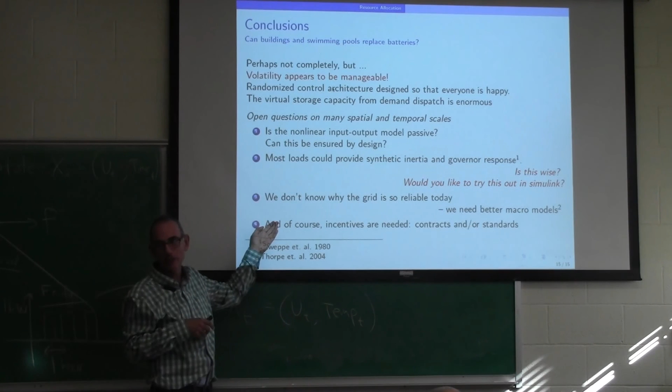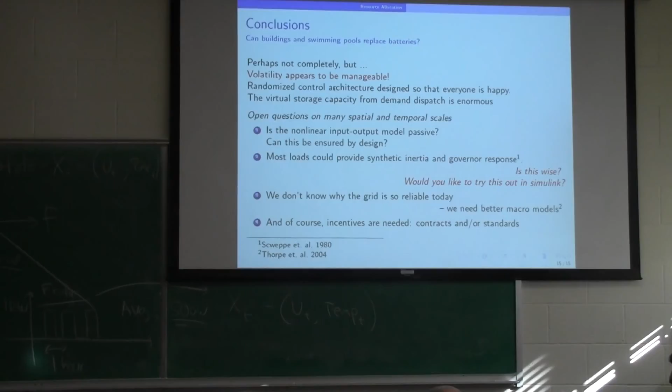People are busting for solar, and they claim they want to save the planet. Most people just want to save money. But if you explain the issues, that yes, you could have a lot of solar, but we'd have to do this balancing act. Just like you could have cars if only we had roads. It seems we could sell this. I don't know. Anyway, enough of that.

That's the end of this part of the course. Basically, there's a bunch of stuff that I left out thinking I didn't have time, and I'm going to stick it in starting next lecture. And it'll sort of be optional, but I hate to say that. I'm afraid nobody will come. But it's about reactive power, AC and DC power flow, stuff that is very independent. I'm going to cover it even if nobody comes. I've got it videotaped from last year, but maybe not. It'll be fun to come in. I think that's all I have to say about controlling the grid.